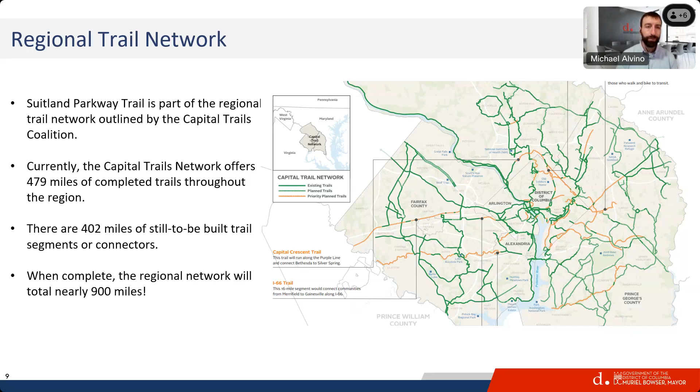And the Suitland Parkway Trail falls into that vision. The Suitland Parkway Trail is an existing trail along the north side of Suitland Parkway. Our focus tonight will really be this area in purple, which you see in the map on the right. But there is sort of a regional vision for this trail that extends beyond that, both going into the district, connecting through future separate projects up all the way to the Frederick Douglass Bridge, and connecting over the Anacostia River into Navy Yard and on to points into downtown DC.

Furthermore, there are plans by our neighboring jurisdictions in Maryland through the National Park Service to extend the Suitland Parkway Trail all the way to the Suitland Metro Station to the east, going into Prince George's County. So we're thinking today about rehabilitating the existing trail, but we're keeping in mind the future vision of this as really being a long destination for pedestrians and bicyclists.

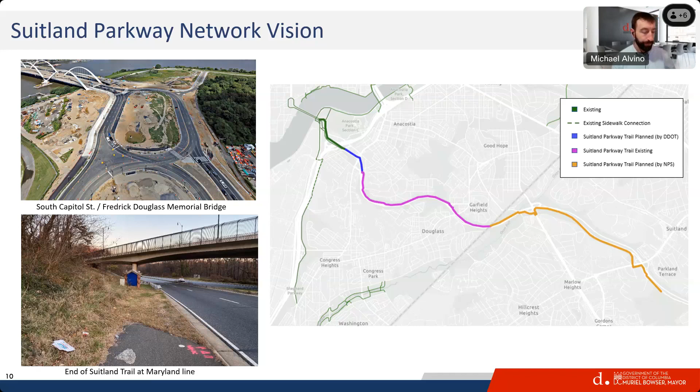So I want to start by going back and telling a little bit of the history of Suitland Parkway. If you attended our first public meeting back in February, some of this may not be new to you, but I thought it was important that we cover it again.

Suitland Parkway was built in the 1940s. Much of this area of the city was developed in the 1930s and 40s. It was really developed as a connection during the World War II effort and shortly after, to connect the military bases, what is now Joint Base Anacostia-Bolling and what is now Joint Base Andrews. So it was really a federal interest, a military interest, and it maybe wasn't necessarily done with the community or the future of the city in mind.

The trail itself, the Parkway Trail that runs along it, we don't have great records of it being added or constructed, but we believe it was added in the 1990s when the roadway itself was rehabilitated.

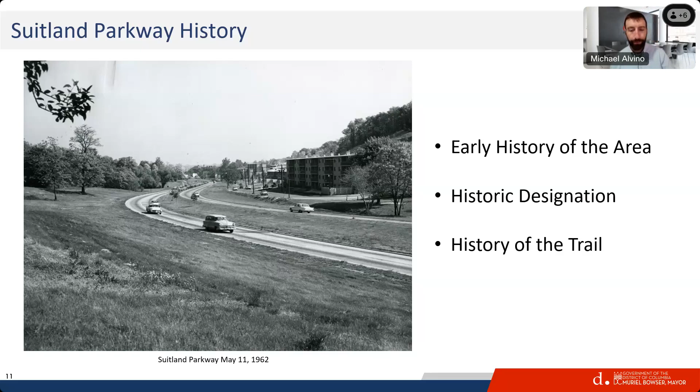We have some photos here from the initial construction of the Parkway, Suitland Parkway, which happened in 1943. You see the captions here, the final construction of the B Road. The Parkway was actually constructed as two separate roads, the inbound lanes and the outbound lanes. They constructed the outbound lanes first, and called that the A Road, and then came back and constructed the inbound lanes, which they called the B Road.

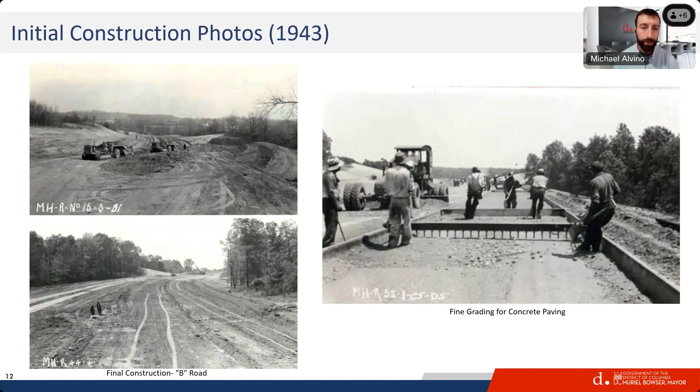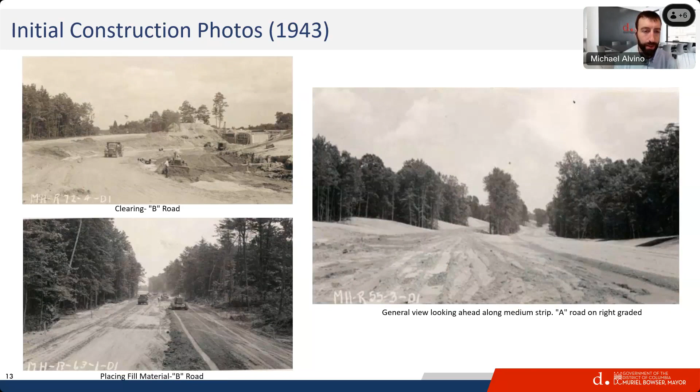And a little bit more of this construction. On the right, this is the area looking east from about modern day Sheridan Road. And on the left, the top left is looking towards Alabama Avenue. You can see it's a little small, but you can see the bridge of Alabama Avenue over Suitland Parkway taking shape. And on the lower left, that is in the vicinity of the intersection of Stanton Road and Suitland Parkway.

And then here we have some photos of the construction of the bridge of Alabama Avenue over Suitland Parkway from 1943.

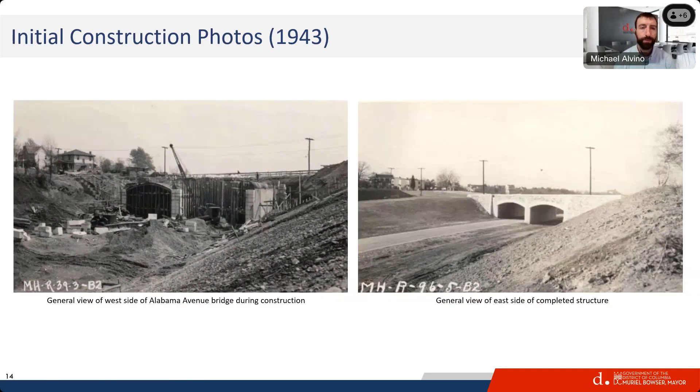So as I mentioned, this was really done as a military project. It was constructed by what at the time was the War Department, the predecessor of the Department of Defense. Shortly after World War II, it was transferred to the National Park Service in 1949. And then in 1973, the parkway and the forests along the parkway were transferred to the District of Columbia.

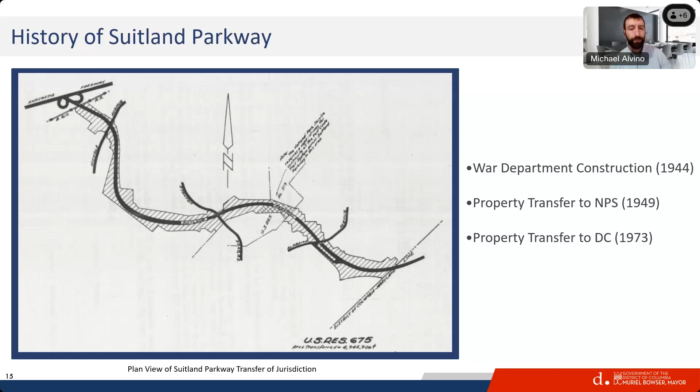So as I mentioned, we've been at this project for a little while now, and the rest of this presentation will really focus on the rehabilitation of that existing trail.

So we kicked off this project around this time last year, and we held our first public meeting in February, really to introduce the project to the public and get initial public feedback. So tonight, what we'll do is we'll share with you what we've heard and where we're headed, and then collect your feedback on that. Since February, we've been meeting with other government agencies, which we'll talk a little bit about.

Their interests, the National Park Service, the Department of Energy and Environment, as well as the public. And we've presented at 3 of the relevant ANCs that this project touches, ANC 8E, ANC 8C, and ANC 8B. And so some of what we'll share tonight has been informed by public comments that we heard from those folks.

So summarizing some of the things that we heard from those ANCs and our fellow government agencies, a lot of the feedback that we heard from people was really around the existing Parkway Trail and how uncomfortable they feel on it. I think one of the most common things that people have to say about the trail is they don't like the speed of traffic that's right up against the edge of the trail. That wasn't necessarily surprising to us. So that's something we're definitely keeping in mind and working at as a main goal of this project.

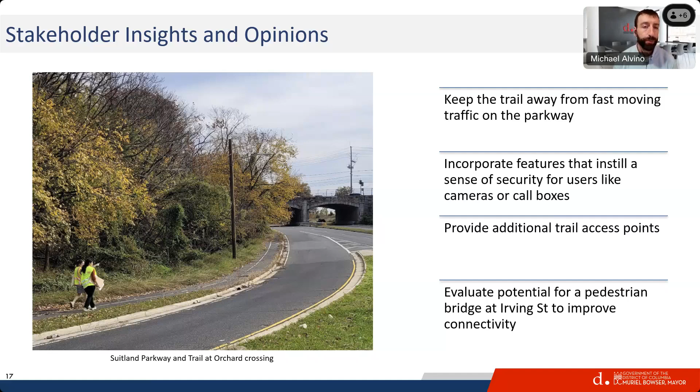And just to reiterate, the project boundaries of this project are really focused on the existing Suitland Parkway Trail that lies between the intersection of Sheridan Road Southeast and Pomeroy Road Southeast, to the end of the current trail at the Maryland line, just underneath Southern Avenue Southeast.

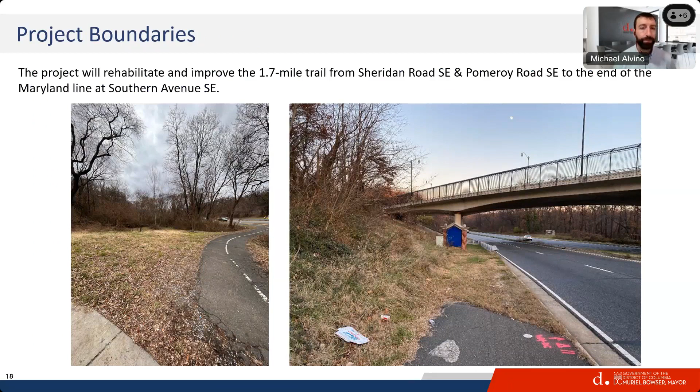So the current trail condition, why are we here? The trail is not in great shape. And that's a big reason why we're doing this project. Unfortunately, based on some of the things that we've identified and things that we're going to talk about, it's not really simple. It's very challenging to do short and medium term fixes to the trail.

And this is based on the location of a lot of utilities that are buried underneath the trail. So we're really focused on sort of a full-scale rehabilitation of the trail and using that as an opportunity to make these improvements. But that is going to take us some time, unfortunately.

But in the interim, while it's there today, the trail is the maintenance responsibility of DDOT, the District Department of Transportation. That's us. So if you see things out there, unsafe conditions, potholes developing, signage that is down, broken glass, please call those into 311 and we will respond to them as we're best able.

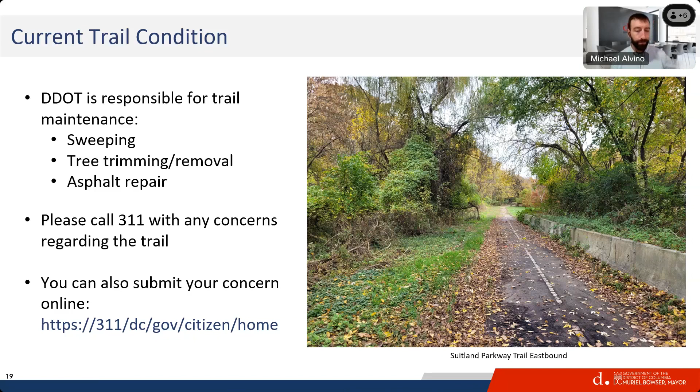So a couple of the considerations that we keep in mind when we're going into this project and developing our trail design. At the top, if you were at our meeting in February, these are things you may have seen before. We're really focused on the trail user experience, making the trail a safe and inviting place for pedestrians and bicyclists to be. We're also focused on improving the lighting, both for the trail itself, but also for the roadway. There's a lack of street lighting along Suitland Parkway, and that contributes to some of the traffic safety crashes that are happening, especially in the nighttime along the parkway.

This is a largely wooded area, and we're very invested in our tree canopy here in the District of Columbia. So we wanted to maintain and preserve as many trees as possible. And as I mentioned before, we're very concerned and very aware of the number of utility lines that there are under the parkway and along the trail here.

But based on the public outreach that we've done and some of the other work that we've done with the government agencies, we've updated this list with a couple other things that we're keeping in mind. And the first among those is potential cultural archaeological resources. One of the things we'll talk about in a minute is that the parkway, when it was built, it went through the former area of Barry Farm, and it was not open green land. There were homes and roads there and houses and buildings, and many of those were cleared to make way for the parkway.

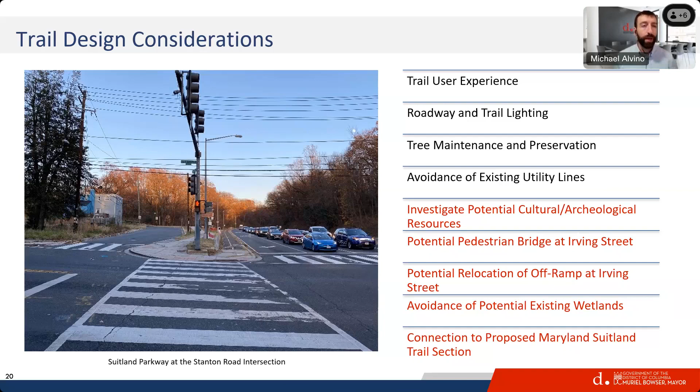And then lastly, we've gotten a little bit more information about a potential progress of the trail on National Park Service property within Prince George's County, Maryland. And so we're looking to tie our project into that project as seamlessly as possible.

So as I mentioned just a second ago, the northern end of the project actually falls within the former area of Barry Farm. And if you're familiar with the history of Barry Farm, it's a very nationally significant site to the history of the country, as one of the first locations that freed Black men could purchase property. And part of this property was taken and relocated when the parkway itself was constructed in the 1940s by the War Department.

So what we have here is we've initiated research with our State Historic Preservation Office that we call the DC SHPO. And they've shared a great deal of information with us about where some of these properties used to be, some of these homes and roadways before the construction of the parkway in the 1940s. So what you see here on the left is an overlay of where those buildings were before the parkway was constructed. So as we move forward and consider realigning the trail, rebuilding the trail, we're going to want to do some further research into what was here. Is there the potential for archaeological findings under the ground there?

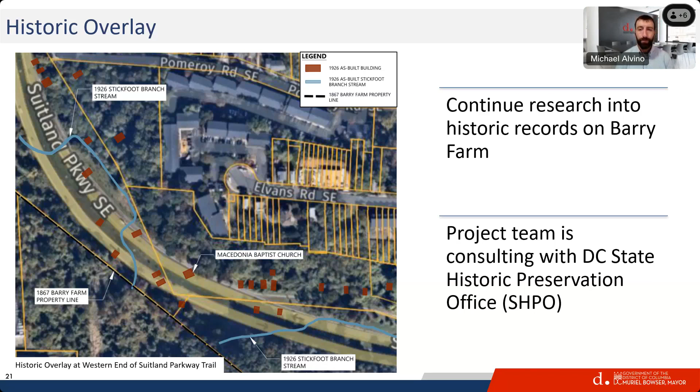Another big issue for us, as I mentioned before, is the tree maintenance and preservation. This is a very wooded area, and we do want to preserve the tree canopy of the city as much as possible. And not just the canopy, but also right here at the intersection of 22nd Street and Irving Street Southeast is the orchard. This is an orchard that's planted with native and heirloom species of fruit trees, pomegranates, persimmons, pears, apples. If you haven't been down there, I strongly encourage you to examine this. Go and grab some fruit for yourself. But this is an area that we're also interested in keeping as much of and possibly expanding it if possible.

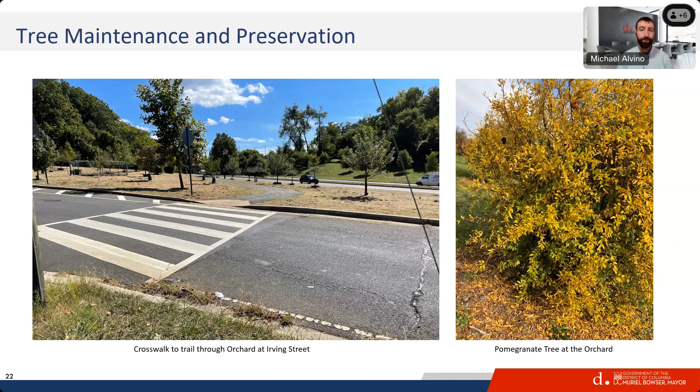And I also mentioned the utilities. So this is a big design consideration as we move forward with the project. And it creates some interesting challenges to work around. Underneath the Suitland Parkway, we're aware of storm drains, sewers, water lines, gas lines, as well as underground electrical. And so as we look at ways to realign the trail, potentially add walls, potentially add streetlights, that's going to be a key consideration for us.

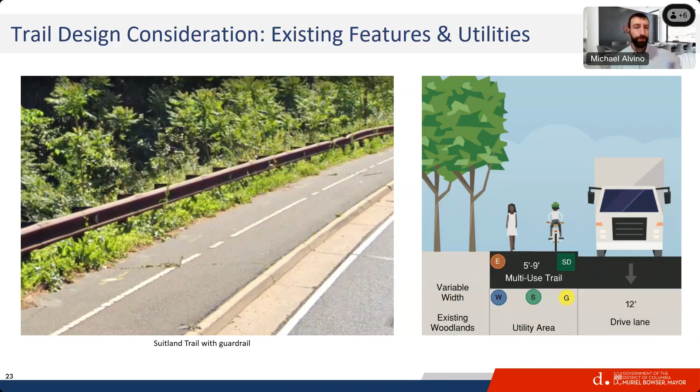And then last but not least, the topography. If you're familiar with Suitland Parkway, you know it's a very steep area. The parkway is in a nice valley area, but the neighborhoods are often at a much higher level, and those slopes between the neighborhoods and the parkway can become very steep, which makes adding additional access points challenging. It also creates challenges for us as we think about relocating the trail further away from the parkway. One requirement of this project is for the trail to be completely ADA compliant, meaning it has to have gentle slopes that can be traveled by someone in a wheelchair. We're dedicated to that, and these slopes are going to make our work fun and interesting.

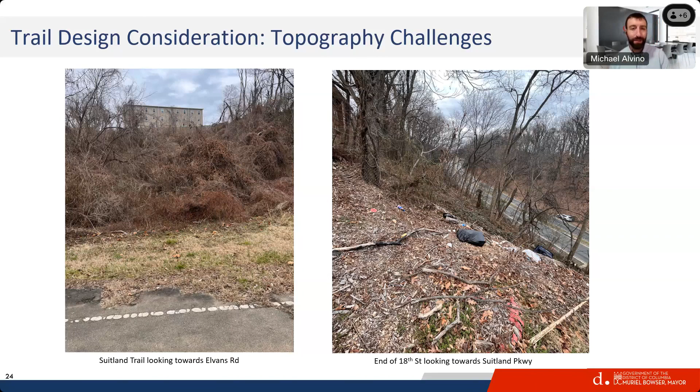As I mentioned, the topography can be a real challenge for creating access points. Today there are only three access points that a person can get on or off the Suitland Parkway Trail: at Sheridan Road, at Stanton Road, and at Irving Street. Based on our initial investigations, we've found four great candidates to add new access points to the trail: Gainesville Street Southeast, Alabama Avenue Southeast, and down at the southern end of the project, Shipley Terrace Southeast and Southern Avenue Southeast.

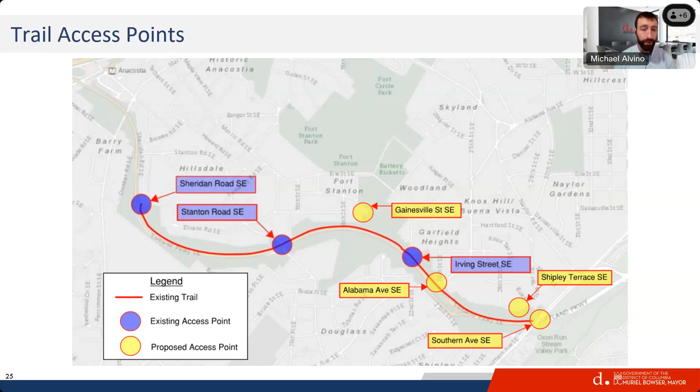One of the things we'll continue working on is looking for ways to add amenities and safety benefits that we heard loud and clear from the public about. That would be wayfinding signage and emergency response markers—mile markers or some kind of emergency response markers so that pedestrians, if something happened on the trail, could call 911 and tell responders where they are so help can get to them quickly. We're also looking at trail amenities like benches and trash cans, as well as opportunities to add stormwater management to capture stormwater, which helps water quality in the city and saves work for our sewers. We're also coordinating with an interesting project happening in this area: the restoration of Stickfoot Branch by the Department of Energy and Environment and the National Park Service.

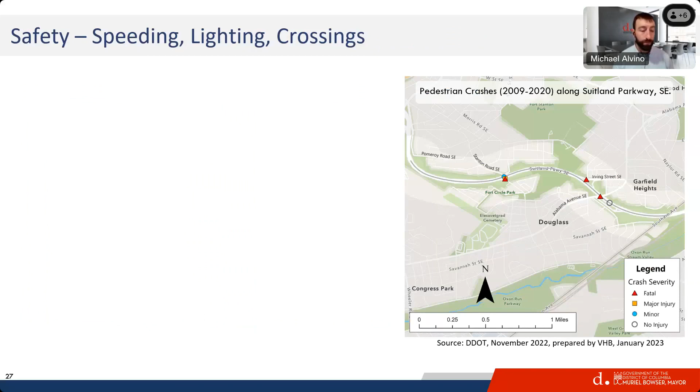I want to talk about safety on the roadway itself. A lot of what we heard from the public, and what's verified in the data, is that there are safety issues along the parkway: speeding, a lack of lighting, and people crossing the roadway. Here you see a person crossing Suitland Parkway at Irving Street at 22nd Street Southeast. This is a fairly common occurrence—you'll see a worn dirt path in the grass where people are doing this. We actually conducted observations and observed at least 8 people making this crossing within one 24-hour period, so it's something that is being used very frequently.

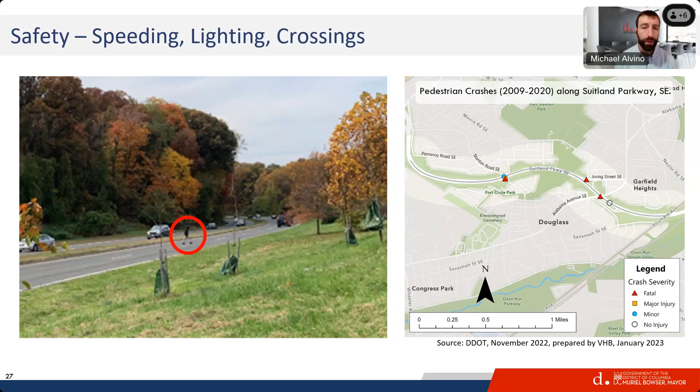Unfortunately, we've had pedestrian fatalities here. On the right is a map of pedestrian crashes from about an 11-year period. The data was available from 2009 to 2020, and we identified 3 pedestrian fatalities that happened on Suitland Parkway, one of them right at this location.

One of the things we're going to be considering, which we heard requested from the ANC, was to investigate a pedestrian bridge at this location. We've sketched up a very simple potential of what it could look like. As I mentioned, because of the sunken down feel of the parkway with the neighborhood being a little higher, there are advantages to having a pedestrian bridge here. The type of bridge and architecture could be determined in a future phase of design. As mentioned, we counted 8 pedestrians crossing daily at this one location, with a very clear desire line worn into the dirt where people are making this crossing.

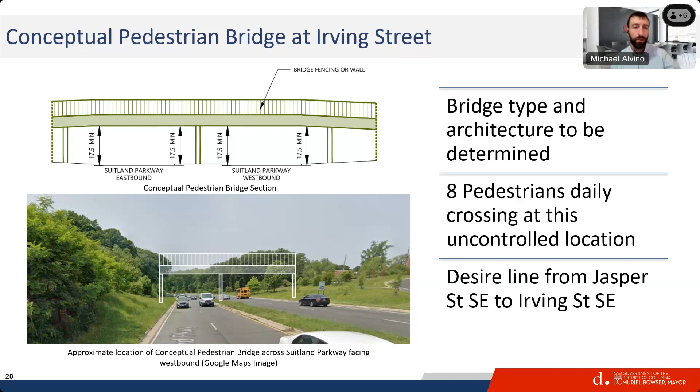We also identified this location, which happens to be near the orchard, where there's an off-ramp from Suitland Parkway to Irving Street Southeast. This is where high-speed traffic comes off the parkway and makes a right onto Irving Street Southeast, and the trail crosses right in the middle of that ramp. We identified this as a real dangerous trail crossing for pedestrians.

One of the things we're recommending is realigning that ramp to line up more directly with 22nd Street Southeast, so a pedestrian could cross at an intersection in a more predictable location with better sight lines for vehicles coming off the parkway. This would mean realigning the ramp through that portion of the orchard closest to Suitland Parkway, but we could depave the old ramp and provide more space for future fruit trees there.

We'll continue studying, if we move forward with this, any potential impacts on traffic to the neighborhood from relocating the ramp a little further back on Irving Street over to the intersection at 22nd Street.

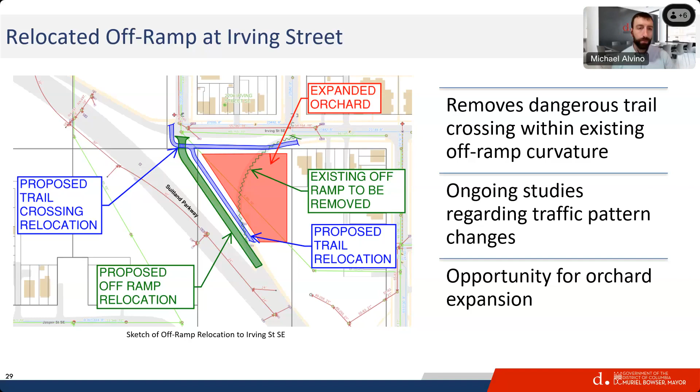Now we're going to walk through the whole project area bit by bit, and we'll show you what we're recommending.

We've broken the trail recommendation into three segments. The first is what we're calling the cross-country trail — locations where we're able to pull the trail fully away from the parkway, separated by a whole other section of trees. In this case, the trail would have its own dedicated streetlights.

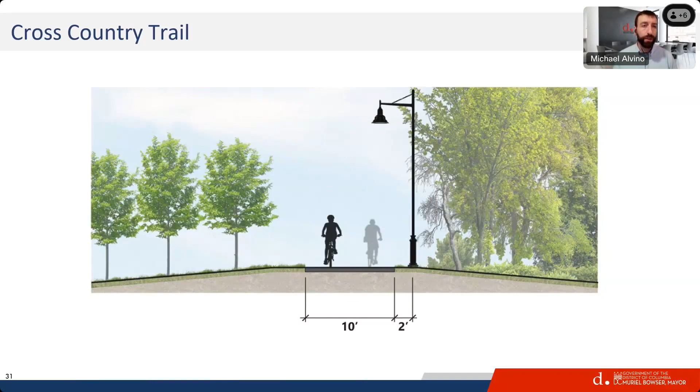In other locations, where we have limited space or very steep slopes, we'll keep the trail close to the parkway but add a crash-compliant barrier between the travel lanes and the trail. In some cases we'd need a retaining wall to hold up the slope behind the woods and trees, and in those locations the streetlights would light both the trail and the roadway.

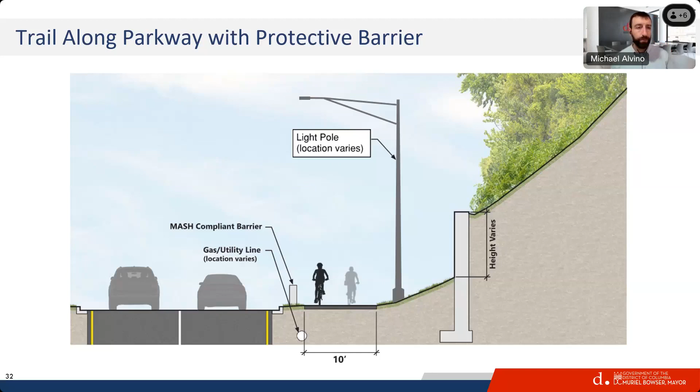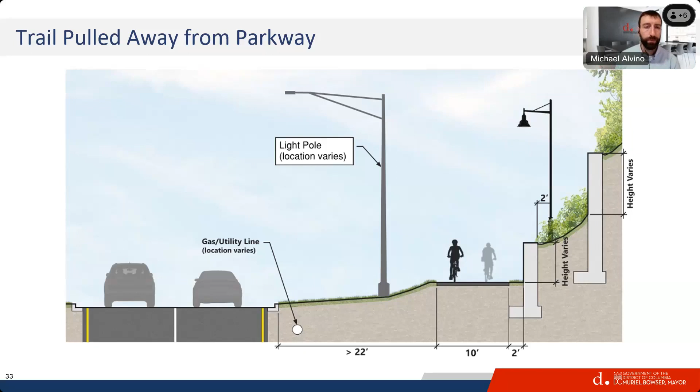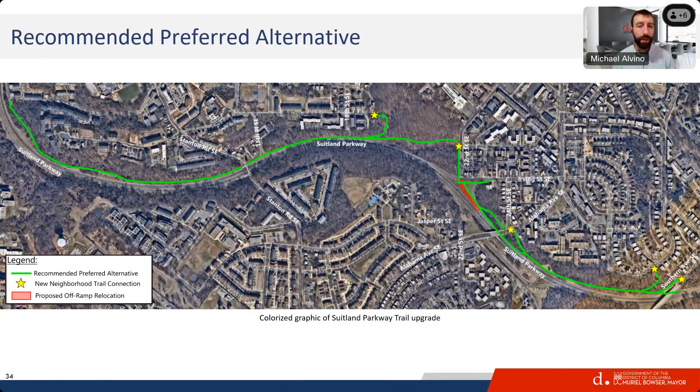Starting at the north or west end of the project, this is the intersection of Pomeroy Road Southeast and Sheridan Road. This is one location where we're looking to establish the cross-country trail, pulling it well away from the parkway into the woods. This is an area where there used to be a Sheridan Road, so there's a very natural grade and separation there.

At a certain point it would meet back up with the parkway and be pulled a little bit, about 15 feet off the edge of the parkway, before moving further east. In this location, there's already an area of the trail pulled back about 15 or 20 feet from the parkway itself.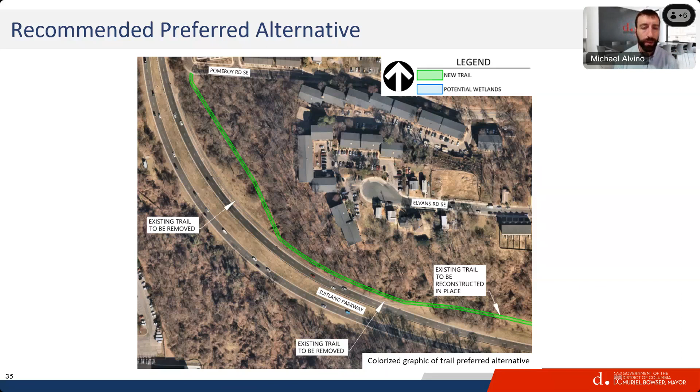Moving east and south along this project area, we're now just south of Elvans Road Southeast. In this image, the trail is being pushed about 10 to 15 feet off the edge of the parkway. The exact location can be determined in the future based on the topography.

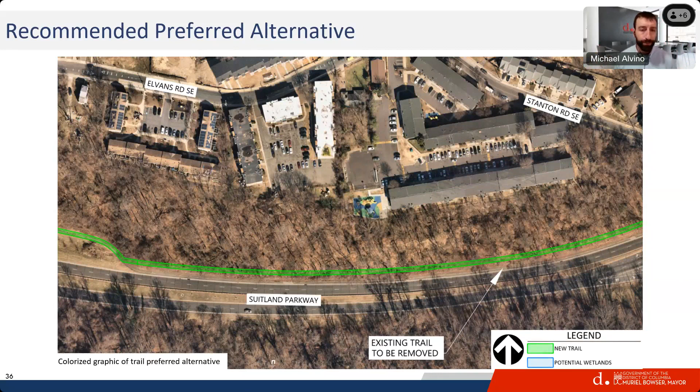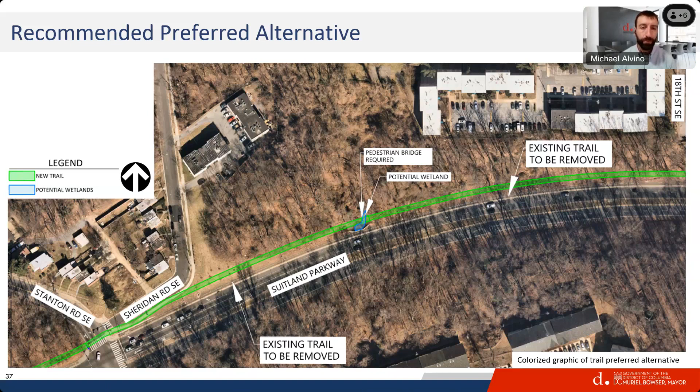Also, marked in blue, are some potential wetlands we've identified. We'll continue monitoring these to nail down exactly where they are. As I mentioned, these wetlands are very ecologically sensitive and important areas, and we want to minimize and avoid all impacts to them. So if we do come into them, we may look at realigning the trail or perhaps bridging over.

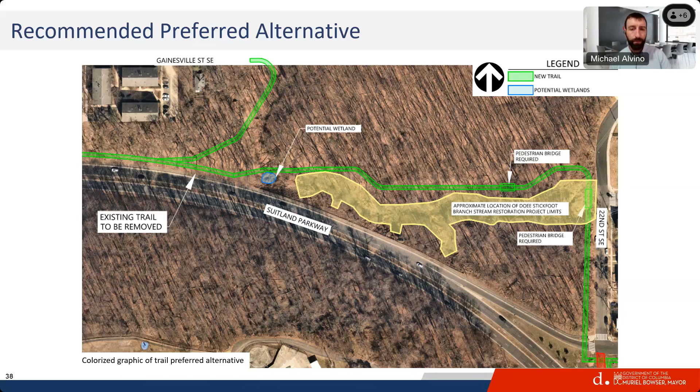Continuing further east, this is the area of 22nd Street and Irving Street Southeast. As I mentioned before, what you see in red is our recommendation to relocate that off-ramp coming off Suitland Parkway to make for a safer pedestrian crossing.

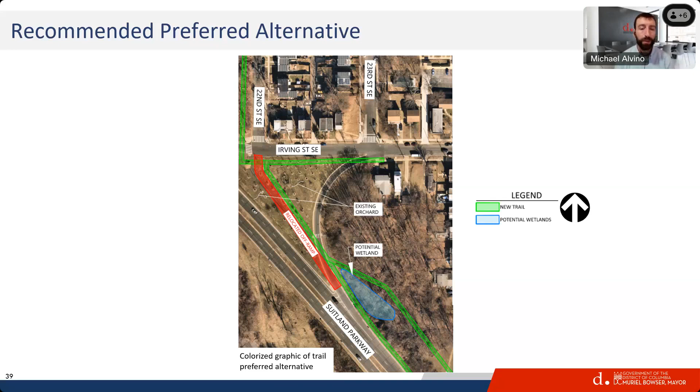Continuing on, the trail would run along the parkway under Alabama Avenue Southeast and then continue. This is another area where the space opens up, giving us a bit more room to push the trail further away from the roadway.

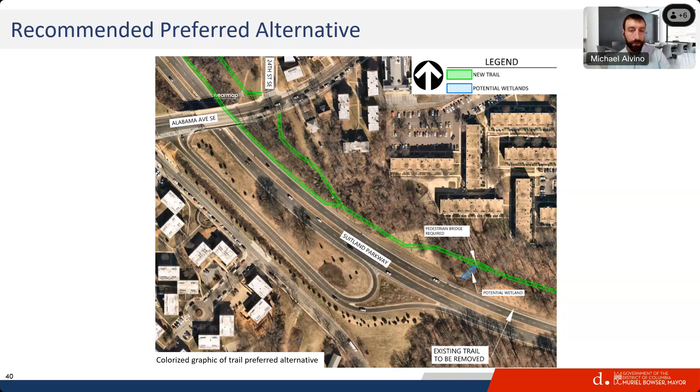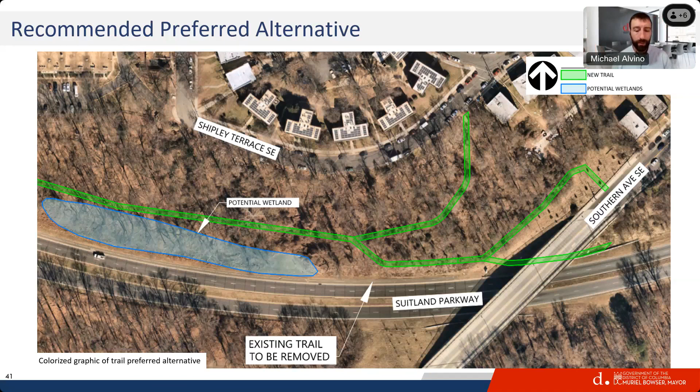We'll be continuing our collaboration with the National Park Service and Prince George's County, Maryland, where that project is being proposed. As you can see right now, the trail just dead ends, and we don't like to see that. We would like to see it connect to a natural location, certainly within the district boundaries to Southern Avenue, but also thinking regionally further down into Maryland.

As part of that, we would consider adding coordination on the emergency response with those fellow government agencies.

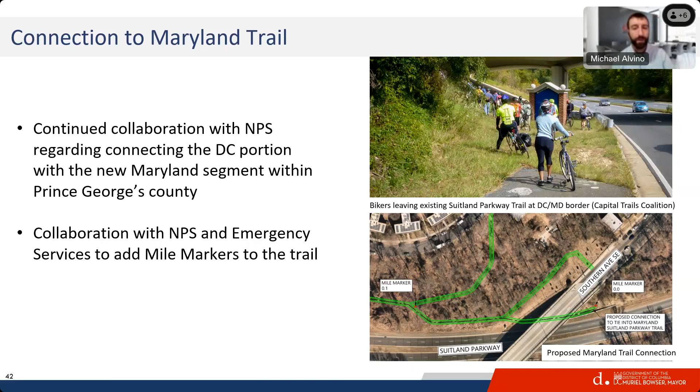So that about covers our update on the presentation tonight. We look forward to hearing your comments. A little bit about where we are: we're in what we call the concept engineering phase, which is also a fancy word for planning. We're in the initial phases of this project. We've developed these concepts and we're recommending them here at this point. We'll collect your feedback here tonight, continue to work with our other government agencies, and then review them all for environmental impacts. We look forward to finalizing a recommendation for the planning portion and the concept engineering sometime early in 2024.

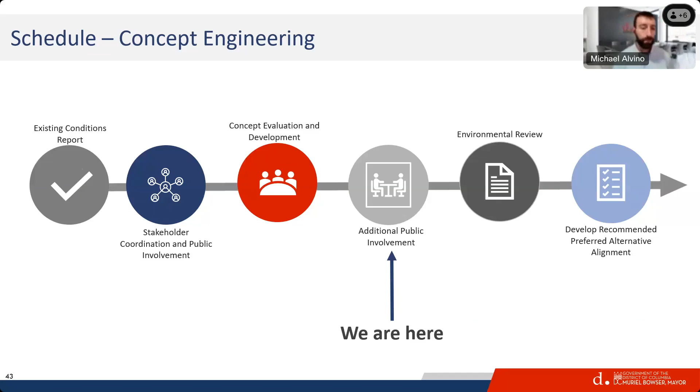Our next steps, based on the feedback we hear tonight, is to develop a recommended preferred alternative. As I mentioned, we'll continue meeting with our fellow government agencies at the police department, fire department, the Office of Unified Communication, which handles 911 responses, the Department of Energy and the Environment, National Park Service, and the State Historic Preservation Office.

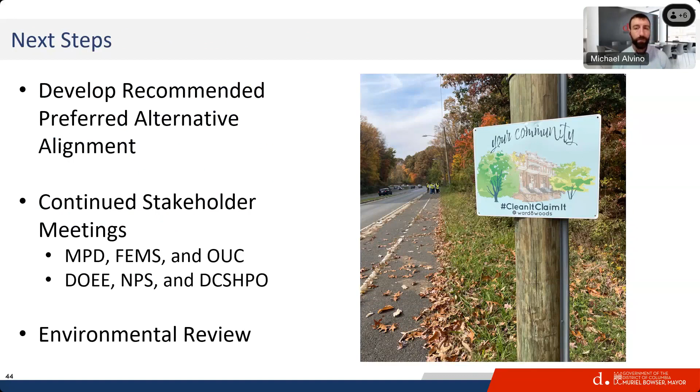That will wrap up the concept engineering phase. Based on that information, we'll move forward into the next steps for us, which would be design, which would have more public outreach and engagement, and then on into construction. As I mentioned before, this is a very lengthy project, so we don't have those dates nailed down for design and construction yet. But this is a years-long project, not something you should look out your window and expect to see tomorrow. There'll be many more opportunities for input and feedback along the way.

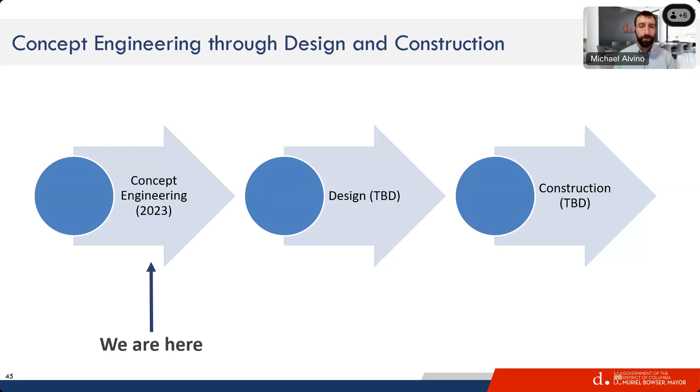Last but not least, we heard a lot at the ANC meetings. People are interested in contracting opportunities with DDOT. So if you're a business, or a Ward 8 business, and you're interested in working with DDOT, I would encourage you to look at the District Transportation Access Portal, what we call DTAP. This is a location where you can find information on upcoming solicitations, bids, and projects that DDOT is doing. We're doing a lot of work all across the city, and there are a lot of opportunities for certified business enterprise and disadvantaged business enterprise through the Department of Small and Local Business Development. So if you have a small business, or any size business, and you're interested in these contracting opportunities, I encourage you to look into these resources.